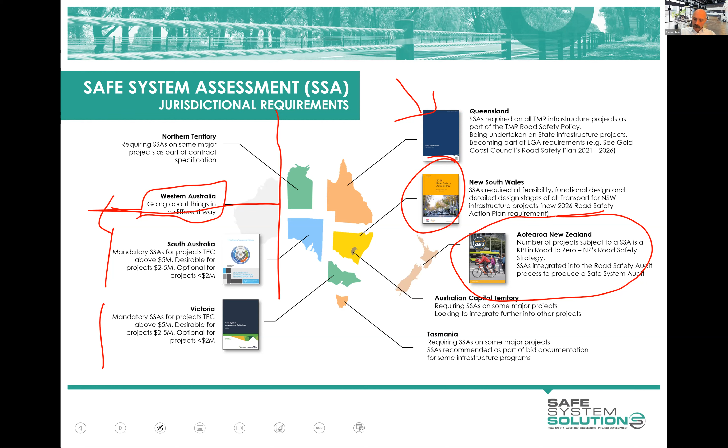Okay. Keep your questions coming in. That was a good one. Okay, where are we at now?

I'm going to talk to this slide for a little bit of time, so get yourself comfortable. But after I've talked to it for a while, I will get your insights and what you think about this.

Now, this was an independent evaluation of 35 safe system assessments that were undertaken on major projects in Victoria a while back, fairly early after the safe system assessment framework was released. This evaluation was led by Blair Turner, for those who know Blair,

and done with ARRB, and Kathy and I were discussing whether Phil was involved in this. So Phil, you can tell us in the chat if you were involved in it. No, he said no. Okay.

So we've got all these major projects, and I'm talking big: duplications of highways, bypasses of towns, major freeway interchanges, extra lanes on freeways. And what was done was, using a crash prediction model, they said, hypothetically, if this project wasn't done, what would the deaths and serious injuries be over the next 20 years in that area?

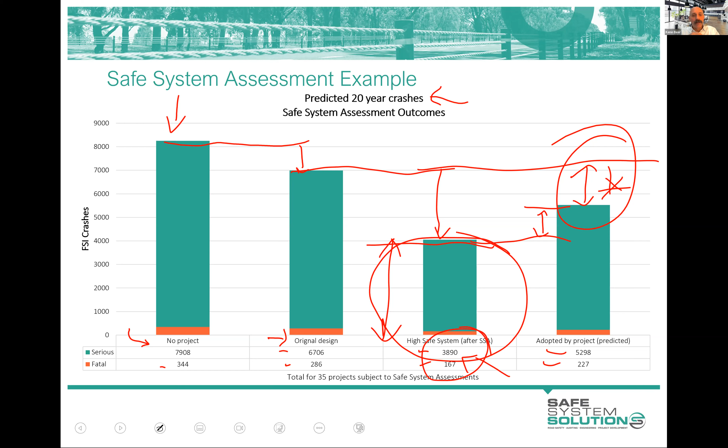Understand that just doing safe system assessments alone is not going to eliminate death and serious injury for us into the future. It's going to do a pretty good job. We need to work with designers, and this is very much happening, to bring this down. One thing you'll discover is that the more safe system assessments that are done, the quicker this comes down. Because designers get these safe system assessments, they look at them, they go, okay, we can change that. Then the next design they do, they incorporate that in, because they go, oh, that safe system assessment said that that's actually better, so let's do that from the start. So that's going to be good.

We're going to try and work on this gap by lobbying for more funding, political acceptance, commitment, educating designers and project managers and major project organizations about why we're pushing these things and the philosophies. And then we're going to work on getting this one down through innovation, new ways to think about designing, managing roads, land use, all sorts of exciting things there that we can suggest. And hopefully we start to address some of this residual here, again, through innovation, through technology, through vehicle stuff, through policy and the like. So I told you I'd talk about it for a while. I hope that makes sense.

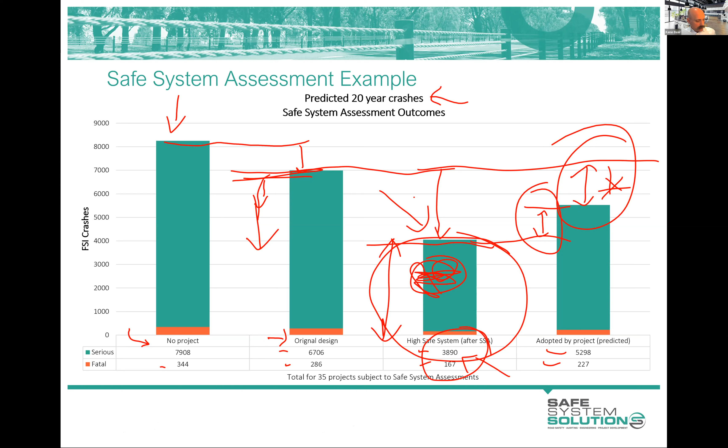Now, I don't like a slide with this many words, but I took from the Victorian Government Safe System Assessment Guidelines and the South Australian Safe System Assessment Guidelines these dot points, which are around what are the benefits of a safe system assessment. Why do I want to make sure you're clear on this? Because you need to go out there and convince people to start doing safe system assessments, because I just showed you that we can save more lives and prevent more serious injuries by going through this process. And that's pretty important. We need to convince people. So, a great way of determining how a project proposal aligns with safe system principles.

Clearly does it, nice graph, everybody can see it. That's good. Method to compare project design options from a safe system perspective. Now that's pretty exciting because

we, as road safety auditors, are told a road safety audit is not your vehicle to compare road design options. You would simply audit each option and provide them feedback on the different risks associated with each option. But with this, we have a way to sort of get a statement forward of which has better alignment with safe system principles and make further recommendations. So that's pretty exciting. Provides good information for changes that will move a project closer to safe system principles.

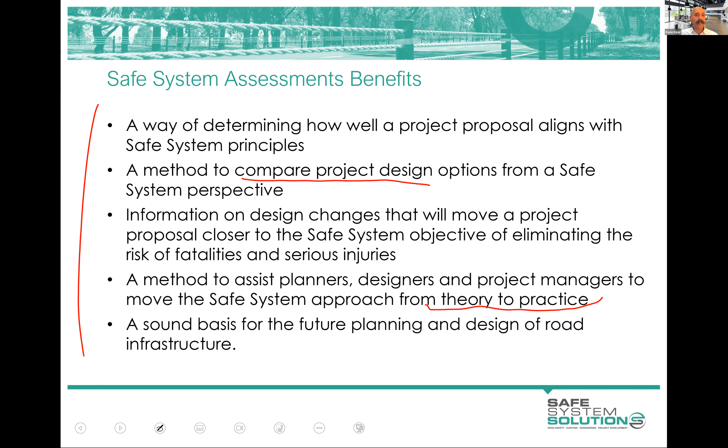But translating philosophies and big picture stuff like that to on-ground decisions that we make can be a very challenging thing. So it's great that we have this tool now to assist us in doing it. A sound basis for future planning and design for road infrastructure. So some good advantages. And I mean, these are some of the reasons, plus the evaluation that we see now, almost all jurisdictions are starting to mandate this and integrate it into project processes.

But let me talk about that process guidance. When do we do it? How do we do it? We've done how do we do it. When do we do it? What are the specifics we need to think about when we're engaging safe system assessors and the like?

Okay, so the general guidance is the earlier you can do a safe system assessment, I suppose, the better. But you've got to have a little bit of meat on the bone. You want to be able to have a level of understanding of what's going on or what's proposed. But you don't want it to be down here after a sort of detailed design has been done.

Why do you not want it down there? Well, that project's not going to change fundamentally. It's done. It's been funded. Detailed design's done. You talk about changing intersection form or the like, it just won't happen. So the value of the safe system assessment, in the sense that it will question the fundamentals of a project, is only an advantage if we do it early in the project.

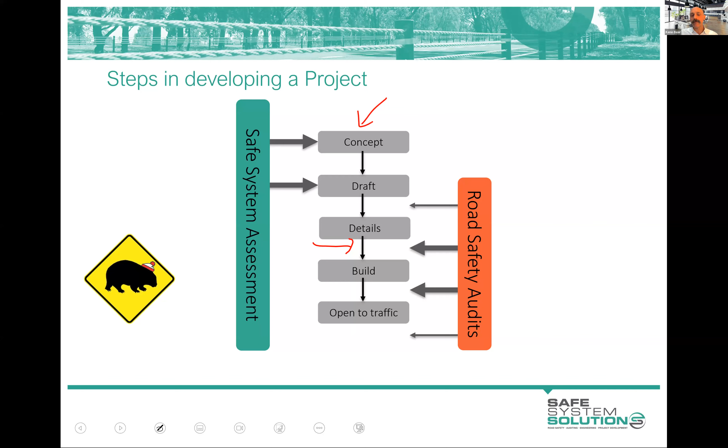So hopefully we're getting better, but I'm still seeing road safety audits that ignore the fundamentals of energy management and mistakes. And the classic is your high-speed signalized intersection. And it's going in, and the audit is just incredibly detailed and excellent at the likelihood.

Sight lines to the signals, line marking, mast arms, LEDs, phasing, all of that good stuff. And it's so important. Absolutely, we need to ensure we've got all of that right. Advanced signage, whatever it is, no see-through effects. But there is just nothing written in there for when somebody does run the red light.

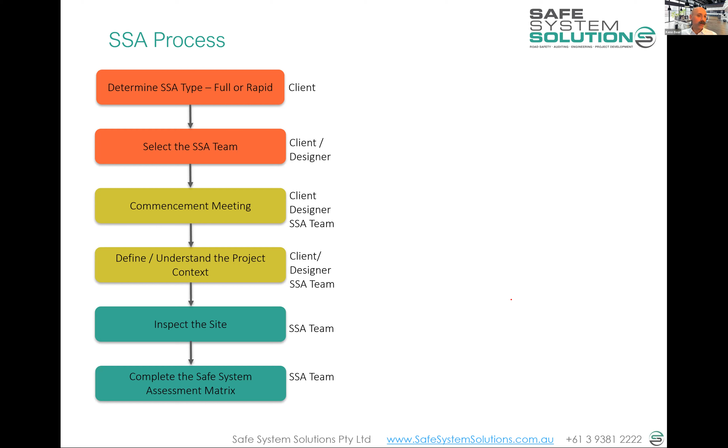You're going to do the matrix for the existing conditions and the design. And if they give you 3 options, you'll do 3 matrices for the options and 1 for the existing conditions. And if they give you 100 options, you'll do 1 for the existing conditions and 100 matrices of options. Then you're going to consider other safe system elements through those qualitative questions that are in the Austroads guide.

Identify treatments to improve alignment with safe system principles, things that could be altered in that design. It could be a different intersection form, it could be addition of road safety hardware features like barriers or crash cushions. It could be other additional things. It could be information programs with the local school on how to use the new infrastructure. It could be enforcement bays or other activity. You're free to add anything you believe will lessen the death and serious injury in that area going forward, and you can suggest that.

They're not obligated to take on anything. There's no regulatory power with a safe system assessment. This is advice to them. It's up to them what they take on. But you write all of that up into a report. We're in a luxurious position now as safe system assessors that there's government templates available in a few jurisdictions, and it's getting us consistency with how reports are done and what specific information is there, and you're using one of those. And I encourage you to use that for future ones. Sure, rebrand it, like the Victorian government has said, use all the existing words in there, let's all have the same output in terms of the format, the structure, the headings and the like.

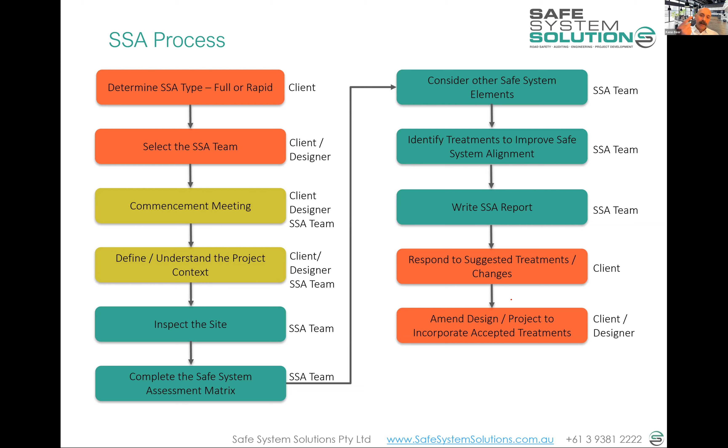Sometimes at this stage, it goes back to here and they say, okay, thank you for all of your recommendations. We're going to do these 7 out of the 10 you provided. Can you please tell us what our safe system assessment scores will be if we take those on? And I kind of like that for a number of reasons. And I'm going to draw a little graph like this.

Because if you've got the existing conditions and you've got a score of whatever it is, and then they've come up with a design and they hand that design over and you score that, right? You say you're improving road safety there and it's going down, your score's going down, your risk is going down, your safe system alignment's getting better. But here are our recommendations. And then you score those, right? They will then be able to sort of go, well, there, and we brought it down to here.

Now, in a business case or trying to convince your director, to say, hey, are we doing everything we can to make this as well aligned with our governmental commitment of implementing the safe system, then this is pretty good proof, because you go, well, that's what we've got out there at the moment. That was our first crack at it. Maybe we did things, but then we got the safe system assessment and they were able to get more in there. And this, practically for these reasons, we can't do at this stage.

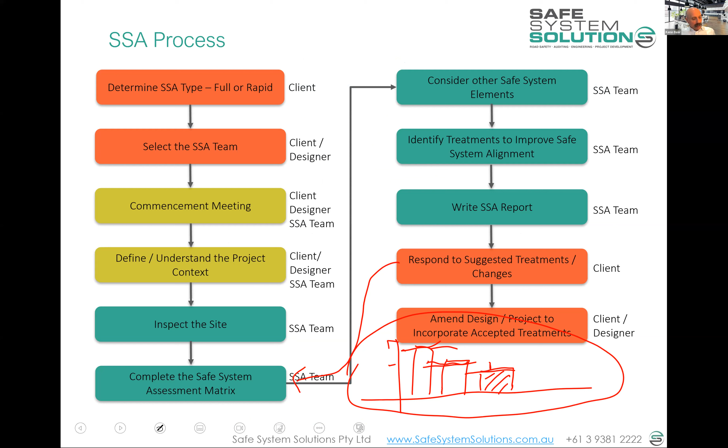How are we going on time here, Kathy? Yeah, I reckon it might be coffee time. Certainly is. If it was a Friday, we might say beer time, but it's coffee time. It's a bit early. And it's not a Friday. Yes, absolutely. We'll have a quick break.

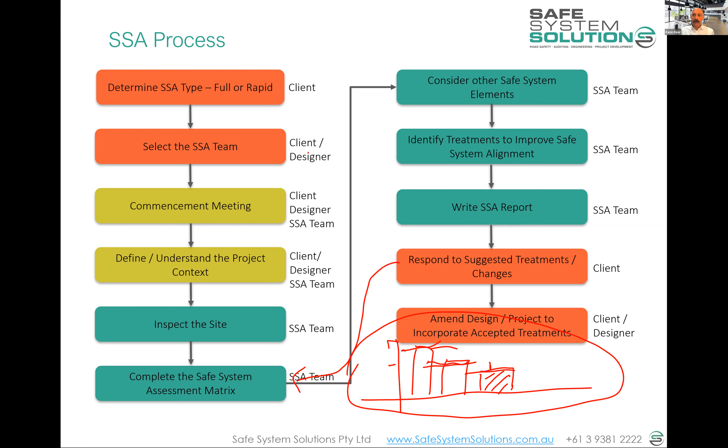Okay, I want to just point you at a couple of the jurisdictional pages that give you more information and give you the ability to register as recommended safe system assessors, or pre-qualified as they would in South Australia. So Victoria is currently running off the VicRoads website. I'm sure that'll change amongst their many department title changes, but safe system engineering, and this is where you sort of find the guidelines and templates and things in there.

But the bit that I want to talk about, which will be relevant to some of you who want to progress onto an established register of recommended safe system assessors, is this process. So it says, if you are interested in getting onto this list, you would flag that with the safe system engineering team, who would simply say, okay, you should do a course or prove your existing knowledge some other way. So you flag it with them, but you won't need to do that because you've already moved into this next phase, which is do this course.

Then what they ask you to do is to gain some experience by doing a safe system assessment. Now, you don't need to do it with somebody who is a safe system assessor, but you just need to get out there and do one. And you need to do the full process. So unfortunately, the mock one we're getting you to do doesn't qualify because you don't have a real client you're working with, and we've intentionally not given you projects with heaps of background information, because we didn't want to have you working on this for a week or something.

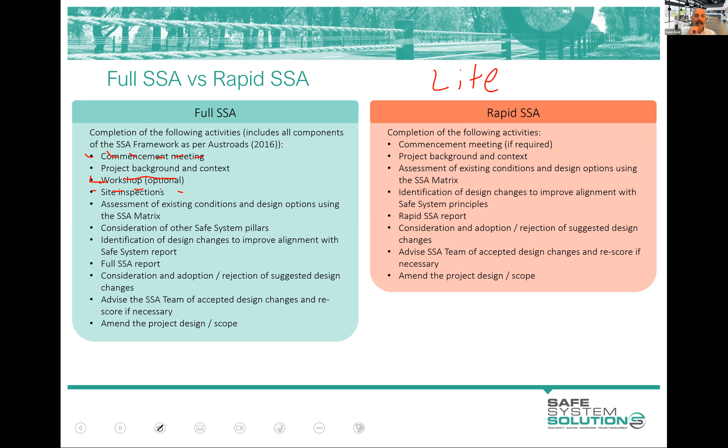Background and context, you're going to need that. Workshop, and workshops sort of following on from that commencement meeting or digging into some details, understanding things. That's kind of optional in a full, but it's certainly something that most rapids would not have. So the site inspection is an option to take out in a rapid. Now, a lot of rapid safe system assessments still do a site inspection. I think it adds great value and you can see things, but the idea is that you could just look at a design and look at photos or street view or whatever it is and get a general sense for what is aligning well or not aligning well with safe system principles.

So assessment of the existing conditions and the design options using the matrix in both. Consideration of other elements, so those qualitative questions. Okay, they're out in a rapid safe system assessment. So you don't need to go through that holistic thinking. Okay. And so you identify changes that could improve alignment with safe system principles in both. You do a report in both. One's just got a little bit more in it. And then the client decides what they're going to adopt and the project team can rescore if necessary and scope's amended. So there you go. There's the differences.

That pretty much covers what I wanted to cover in terms of the policy and the way safe system assessments are playing out in Australia and New Zealand and what people might be asking of you as a safe system assessor, how you can get onto one of those official registers if you would like to do that. But I'm open for any questions now around any of that stuff. This last thing I've got on screen, safe system road environments, is just a nice little exercise for us to finish, which will very quickly have one more last look at some different road environments and note down what aligns highly or doesn't align highly with safe system principles.

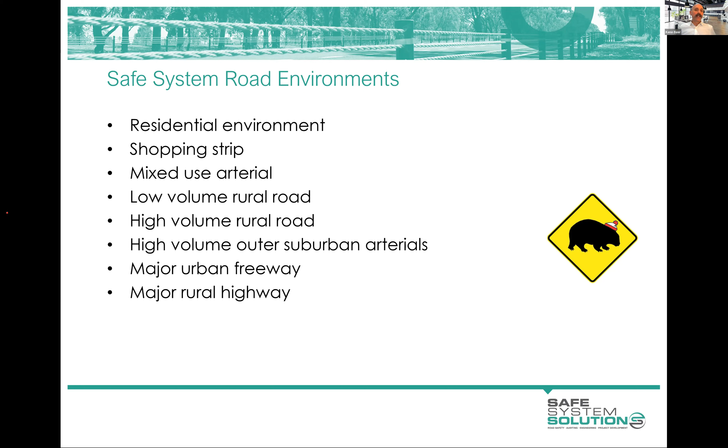So I just want to absolutely be sure that you've got a grasp of what kind of things we are looking for in these road environments that will have high alignment with safe system principles, that if you're doing a safe system assessment on these road environments you'll be adding as recommendations, or at least thinking about it in the right context.

So I think I'll do a few of these as an interactive, get you to type a few things in, clean out the prize cabinet for this calendar year. Kathy will be taking lots of notes, and some of them I'll just run through and say a few things. But let's do the residential environment here. So we're going to do this where you can type it in, but I want you to put in exposure or likelihood or severity. Okay, so if you suggest something, put the E or L or S.

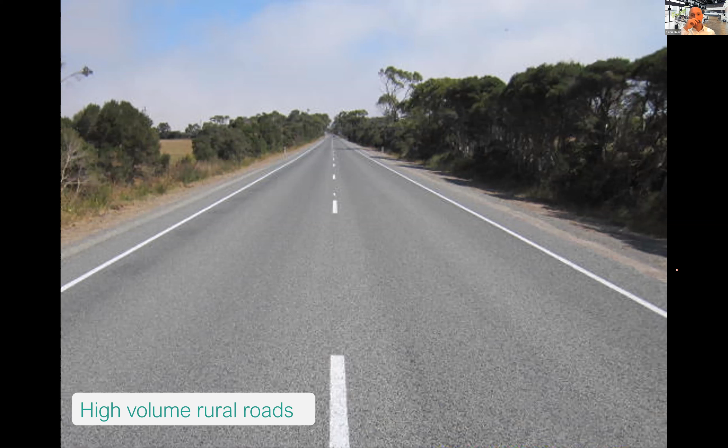So when we're at the higher volume rural roads, this is where the money is going to be put to ensure that we keep speeds high, because these are freight routes. These are major between town centre routes, population centre routes. And so this is where we'll see central barrier systems, outer barrier systems, continuous barrier systems.

When we get to intersections, we want to see roundabouts ideally. And they complement beautifully with a central barrier system, because you can collect a few access points and the like, give them an acceleration lane potentially, and they can U-turn if they need to go back the other way. So we can really create these safe system routes, quite well aligned safe system routes.

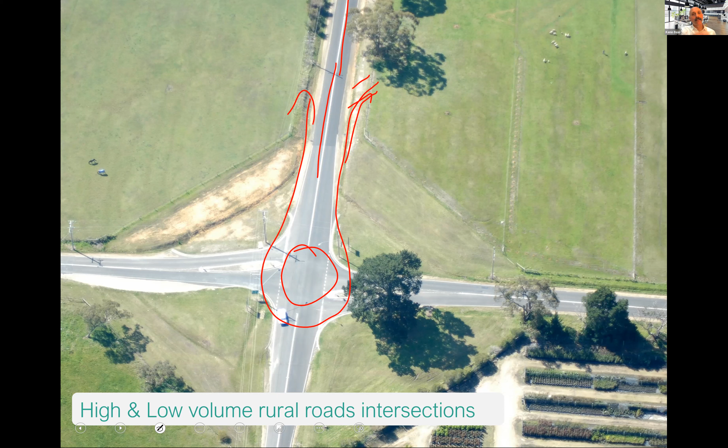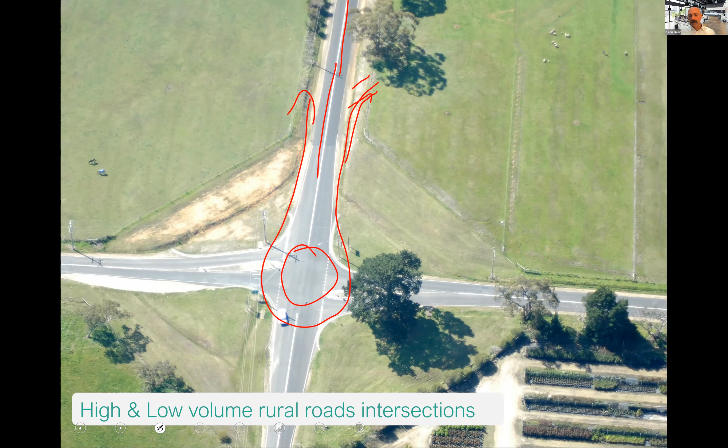It's a fun exercise to sort of plot this out on a 20 kilometre or 50 kilometre route and think about strategic placement of these types of intersections and how many access points you can collect in a reasonable way to get them to go the wrong way, to U-turn or other things. So that sort of thinking can take place.

High volume outer suburban arterials, these are where traffic priority has been assigned and pedestrian priority is low, and it's not a place, it's a movement corridor, and it's vehicles, and that's what it is. Okay, if that's what it is, that's when we start to create the environment that can be done with high alignment with safe system principles.

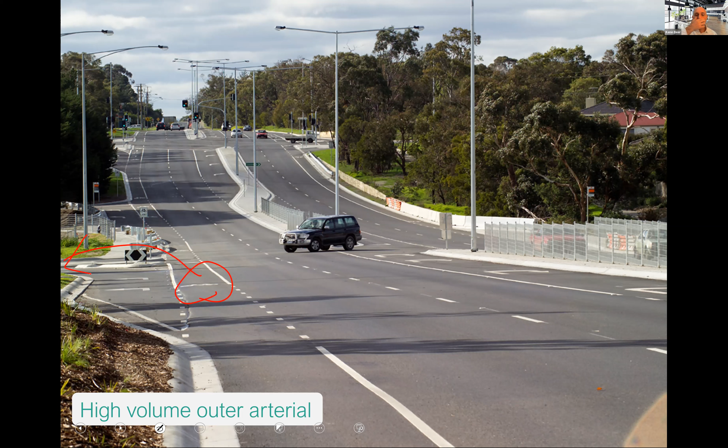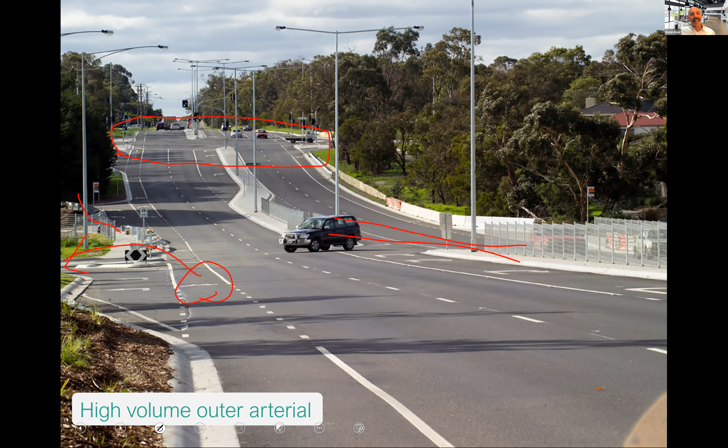So complete off-road shared path facilities or cycleways still need to address speed at the intersection to within tolerable levels, so raised intersections, blocking off as many of the access points as you can, pedestrian underpasses, pedestrian overpasses, eliminate control, reducing the exposure to crashes, and you're kind of almost making urban motorways out of these types of environments. Easy to say, more challenging to do, but the principles are there.

And sort of major freeways or motorways or urban freeways. These have high alignment with safe system principles in the sense that there's no at-grade intersections, there's continuous barrier systems, there's lots of features to reduce the likelihood of crashes, good geometry, lighting, all of these features, and they generally perform quite well. They are free-flowing, very low crash rates, and when they're absolutely saturated, the amount of death and serious injury is very low, because nobody's got enough speed to do that damage. Lots of minor bingles.

When the freeway or the motorway flow breaks down is where we see the frequency of high severity incidents dramatically kick up. So this is where the managed motorway concepts really are highly aligned with safe system in the reduction of likelihood, but also potentially severity. So this is where we have lane use management systems, ramp metering, and so lane use management, different speed signs and ability to close off lanes.

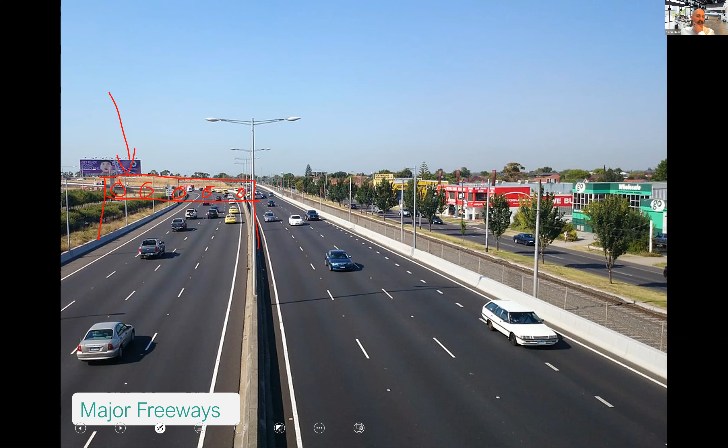But you can monitor and proactively use sophisticated algorithms to drop the speed limit as the flow is about to break down, because the headway and all of those, smart traffic people can work that all out for you. So you can sort of hold the hand of the motorway as it breaks down. And full containment for these, and grade separations or other ways to minimise the speed and angles and the like at intersections.